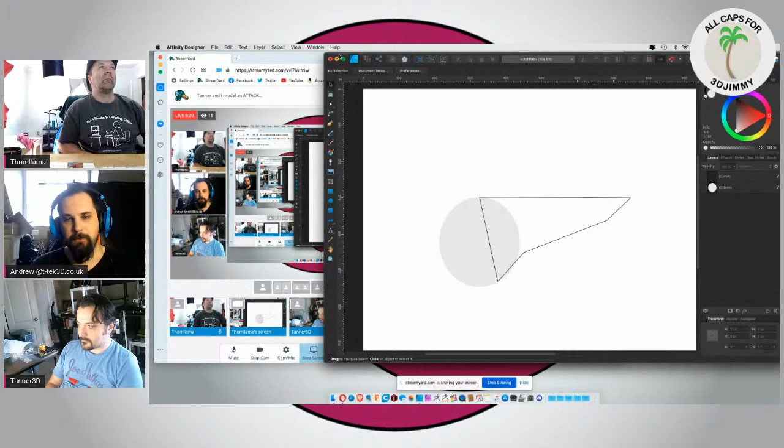What the hell did you do? It's all right, I just changed it to the 2. I was just trying to see if it would make it so that you could have yours next to you, so it'd be a bit easier. But it's just going to double up your screen, so if you minimize StreamYard then you should be fine. Anyway, so we got the bubble, we got the... do you want to do an upper or a lower tadpole?

Flip horizontally. I thought it might be interesting to just specify certain things of it, like as far as having the glass dome front.

Basically that's about our only option. Maybe have a wing on it. Obviously you got what I've got in mind, but the body shape I had in mind is a little different. That's fine, I still want to use the glass dome front. I'll use the glass dome front, but then have a wing thing here somewhere.

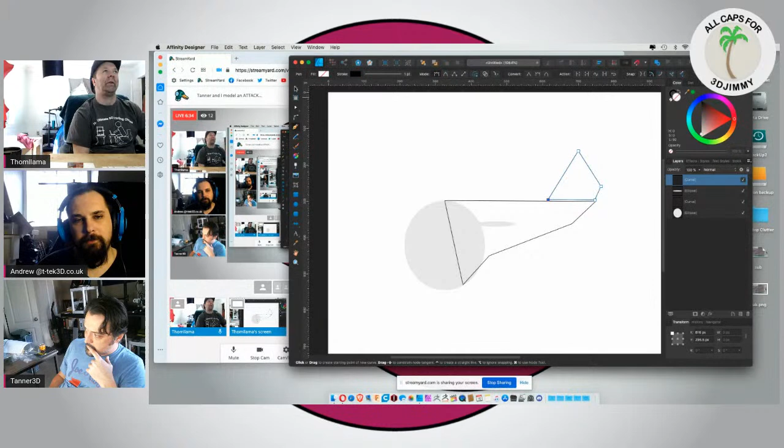I've got more of a bullet shape in mind. A bullet shape? Okay, this is basically what I've got in theory. Something along these lines, and these should all be doing a stroke so you can actually see it. Something along that line, you're going to do like a full-on bullet shape.

Oops, that's not what I wanted. I wanted that, come on, move that. Straighten out that. So you're doing more of an actual square bullet shape, right? Yeah, something more along those lines.

So the kind of idea I had was like a stingray style, with the bubble on the front, so it had the wings that come out at a slight curve. That would be cool too. And then the bubble on the front, and it just has—I've got some wing stuff I want to do too, but we've got to have some basics.

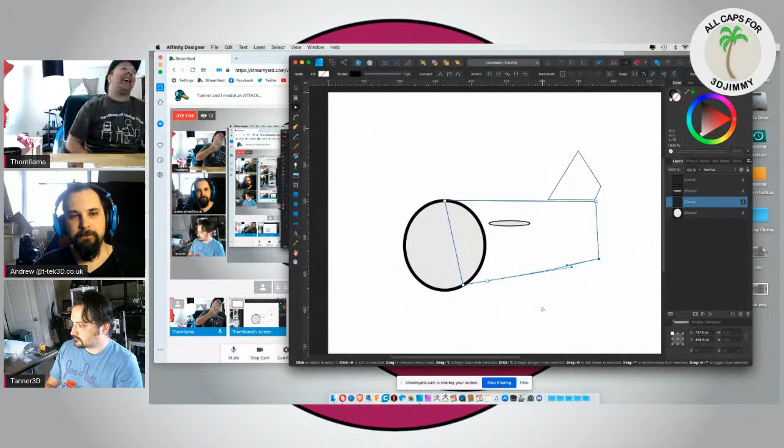For one, physically you need them, that's how you control yourself underwater or in space. But also you've got to have something to mount the guns to. We've got to have guns. But generally that's the idea, that's what we're going to go with. Correct? Yeah, all right, so let's just do it then.

And they're off. Firing it up. Torpedoes, yep, got to have some kind of torpedo or guns or lasers or water cannon or something.

So if more than one person shares screen at the same time, will it just ignore the other one and you switch back and forth? Is that how that works? So if I share mine, it'll just sit in the green room. Yep, until he clicks on it. Okay, yeah, ignore. That's very obnoxious, Mr. Apple.

What I think I'm going to do is actually change mine from sharing the screen to sharing the application window. So I'm actually going to kill this, right, that's what I'm doing right now. Screen, and then do an application window, which hasn't fired up yet. But now I just do Fusion. I now need 3 screens instead of 2, so I can look at my reference stuff. Yeah, I'm wondering, actually, think about that. I'm going to see if I can put this on YouTube right now before we even start and not have it feed back. I'm going to kill it.

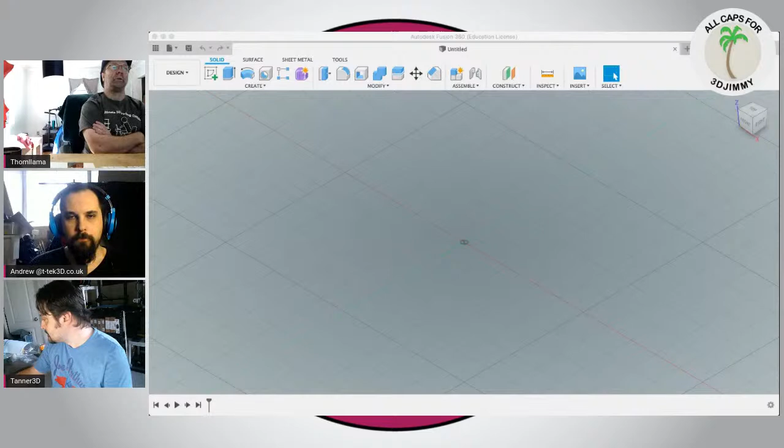Standing 4 straight inches up. 4 inches is 100 millimeters, a little more, a little less. And so, if I leave a gap for 100 to 120 millimeters, you could put your little figurine in it if it came down to it. So from the bottom of their butt to the top of their head is just over 50 millimeters.

And then the length of their leg to the tip of their foot—so back of the butt to the tip of the foot is just under 60 millimeters. So if you figure you give yourself enough room for a rise of 50 millimeters and a run of 60, yeah, so I leave an opening of 100 millimeters. I've got plenty of room to put like a chair and controls and any of that crap I'd ever want to put into it.

Which I don't know how we do, because if it's a glass bubble, how are you going to see through the glass bubble? Because we can't print glass. Right, well, that's where—we're not building these to actually submerge them, are we? No, but okay, because I plan on making cutouts so it looks like there's a framed bubble. Yeah, I was thinking the same thing. Put an actual structure on it, like wireframe, like I have now, but it would look like something, which that's way down the road.

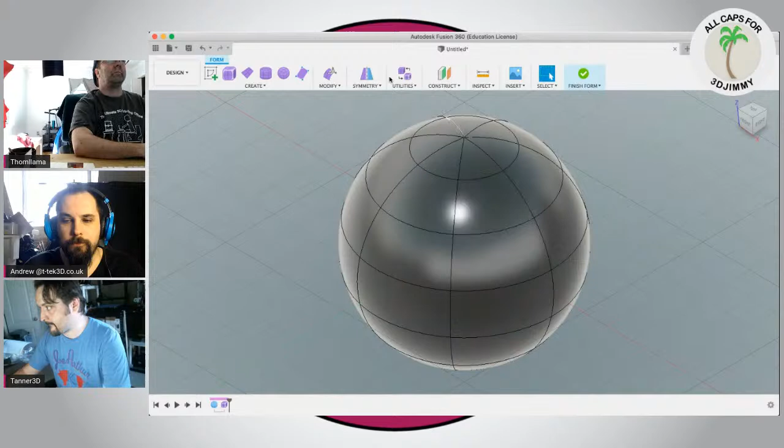Oh, come on, mirror. Okay, and then we'll just start modifying this thing for now.

All right. I wanted that. Actually, I like that better.

So anyway, this is my base shape. It's actually going to have more stuff back here. That's not what I want. I actually just want to grab this one line there and pull it back even more. Yeah, that'll work.

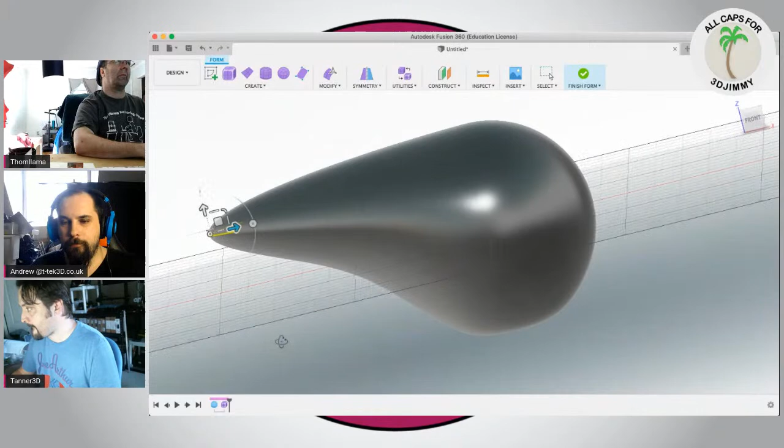And then now I can model off of it. Next thing I want to do is create on that one, that'll work, and make a squiggly line because everyone loves those squiggly lines.

How far up do I want that bubble going? Let's bring it up here. End it. And that works. Finish sketch.

I want to slice body, split body. That's the body, splitting tool. I want to be this here line. Okay.

And I should have 2 separate bodies now. How did I get 3 bodies? What did I do wrong? Was it the 2 halves? How did I get 2 bodies in there? Oh, when I converted it, that's why. All right.

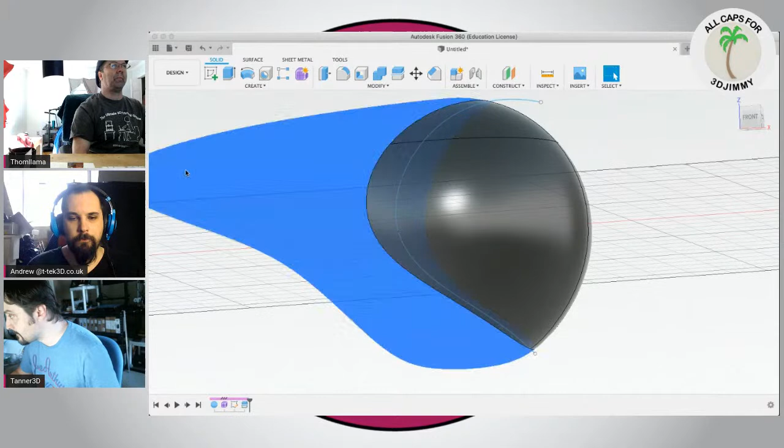Let me guess, the wrong body. No, I didn't. Okay. All right, as you're doing your bubble, has Tanner got his bubble done?

And then I select this face, and I'm going to shell it, going in both directions. I'm going to do... I'm going to do like 2 or 3 in, and then 2 or 3 out. And it's going to freak out, but that's all right, I don't want to go that much. Let's go 5, tab, 5, 5, and 5 are good.

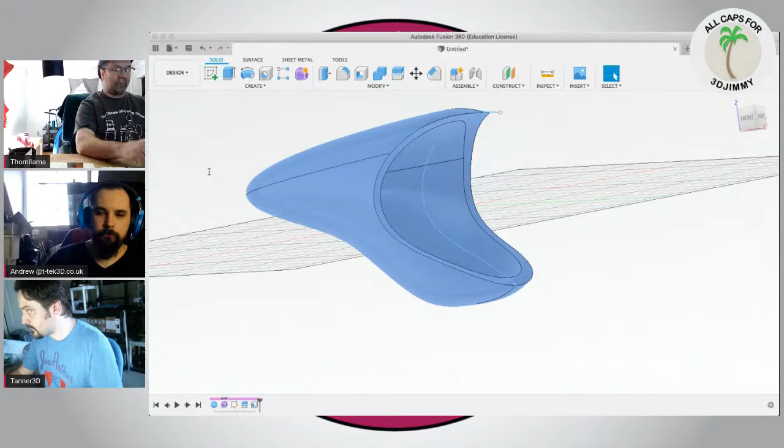And then I can bring back and name this body tail body, and make this the globe. Bring it back. And now I have a base submarine-y kind of tadpole-y looking thing already. Isn't that awesome? Looks like one of the eyes from War of the Worlds.

Now that you say that, it kind of does, doesn't it? And what else do I want to do with it? I want to jump onto Tanner's, see how he's getting on.

Hell? He's making a face. Oh, I see what you're talking about. So you're going to put like the propeller back there in that little area? Yeah.

That's a cool idea, that's a very cool idea. I was thinking more like jet propulsion-y, flowy. Oh, I was thinking of the 2 turbines with the rotational, like the Warthog, the A10. Okay, Warthog, like 2 of those turbines, but directional.

Right, so there's going to be out. Put the little trunk up, and you have the very first submarine ever made, in the Revolutionary War when the dude made it out of a crate basically, and pedal powered himself out there and then drilled a hole into the British boats. That's pretty much what it looks like, which is fine.

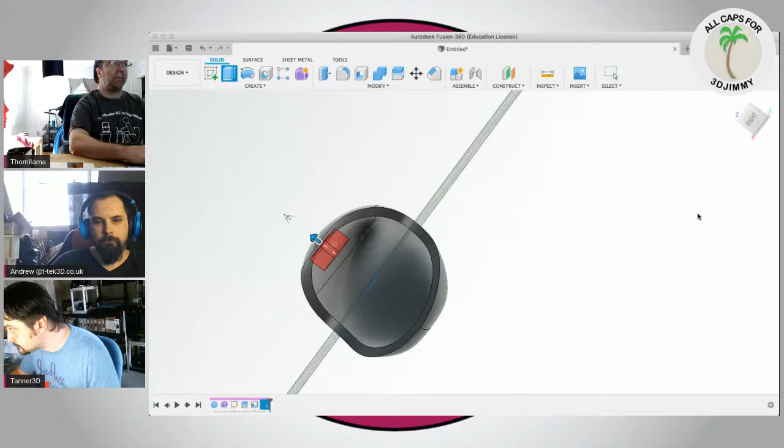Give it a gap. And that's not at all what I wanted. Join. Actually, I think I'm going to leave it as a new body for now. Does that look about right? I can go even more. Let's go to 70. Oh, crap.

I kind of like that, that looks all right. And now I can round this over. And that'll be all right. And then I should be able to, without it freaking out, round all of these over a little bit. I don't think I want to go that much.

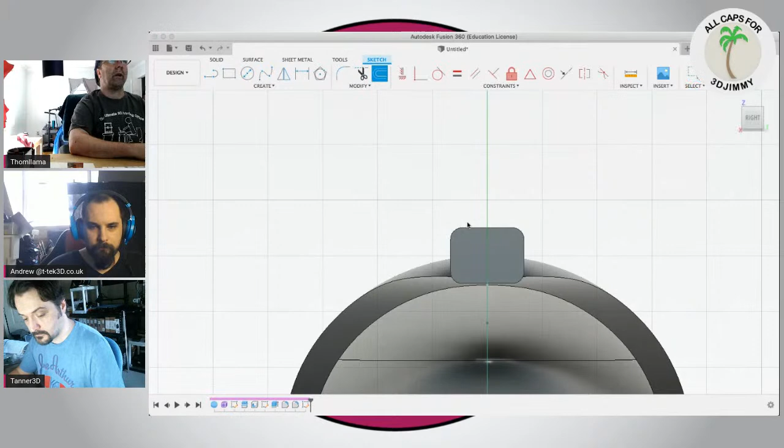That looks good. And I can take that and draw a sketch on it and offset that and go this way. Let's go -2.5. Enough? Sure it is.

And then do it again. And do -6, sounds good. And I'm gonna arc those some more right here.

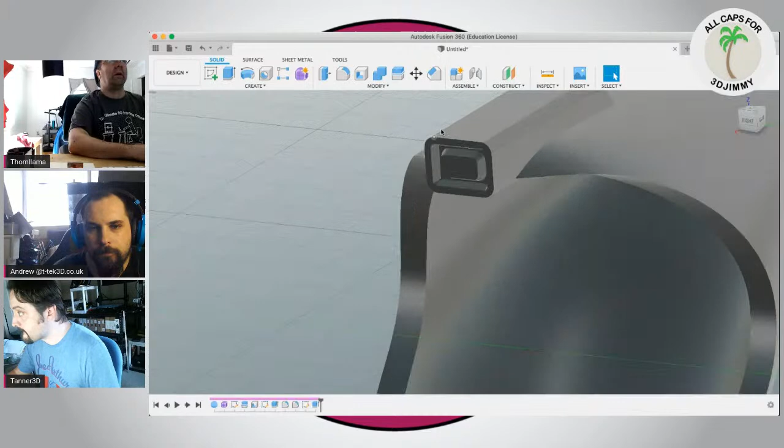And that looks good. And then take this, make it solid, pull it back just like 0.5 millimeter, and arc it there. Am I going the right way or the wrong way? Going the right way. I can give it a little pitcheroo. And then I round this over a little bit, I think, and it should kind of look like a headlight bulb. Right? Does that look like a bulb? Mm-hmm. Yeah. Like a headlight?

See if I can round this over without it freaking out. Just go like 2. Maybe I'll add this. Will it do it to both and still look decent?

Yeah, Seabreacher, I've seen that. What's that? It's the submersible vehicle that looks like a dolphin. And they've also got a shark, and they put it in the Red Bull races. If you've got enough money, you can buy one, a 1-seater or a 2-seater, and it's not meant to go full underwater. It can go underwater, but it's not a submarine as such. So they call it an aqua vehicle. Submersible as such, but not majorly underwater, basically.

There we go. I got a headlight and a little globy thing.

Wow, what does Tanner got? I didn't see what Tanner's doing. He's like going to town with wings. Getting the base structure. Yeah, pretty cool.

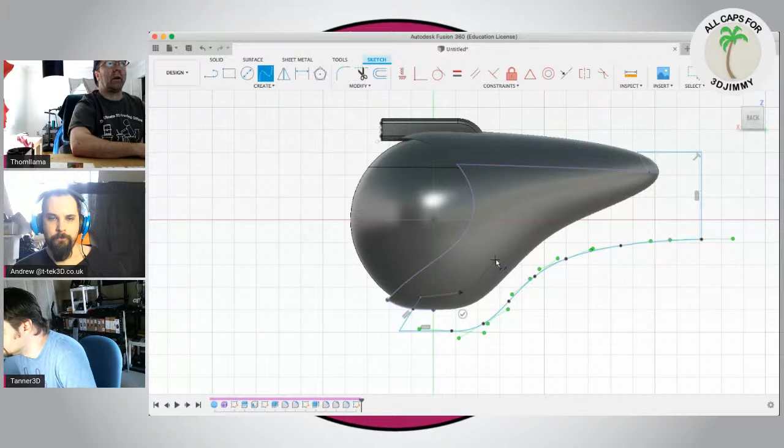And then bring this up. I think I'll go all the way up to here. And that should close me. And yet it didn't because of this escape. Yeah, because it's on a curved body. Yeah, but I'm gonna have to create a plane. Well, I actually wanted to go inside, so I need to do this. Join them, arc, so I got to bring it inside that base. Thing here, and again, following the idea of the shape. Close it, and now I've got a closed piece.

And what happened to my sketch? And I select that. And I expand it out in both directions symmetrically.

Let's do 25. And new body. Okay. I'm going to edit the crap out of it. And then take this. I probably should have done this in multiple segments. And go off of that. Well, do it that way. Yeah, why not? Fish of prey.

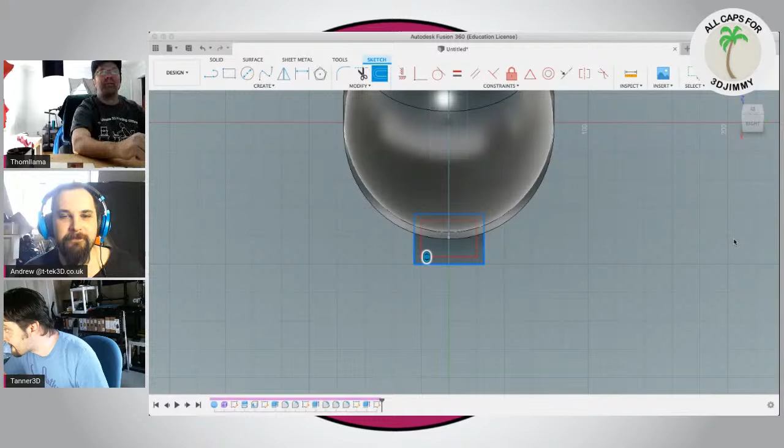We're just goofing off. So anyway, what's Tanner up to?

And actually, I wonder. Never even thought of that. I could do solid. I haven't used, not revolve, sweep. Let's see if I can sweep it. Select path. A path. Yeah, no, I didn't think so. Cancel. But I can create a new path right here to sweep it on.

Oh, I have to go to finish sketch. Yep. And then I need to make a new sketch here to make that sweeping path because I'm a dumbass. Now I can do that path. And that's all I really need because that's all you're going to see. Escape.

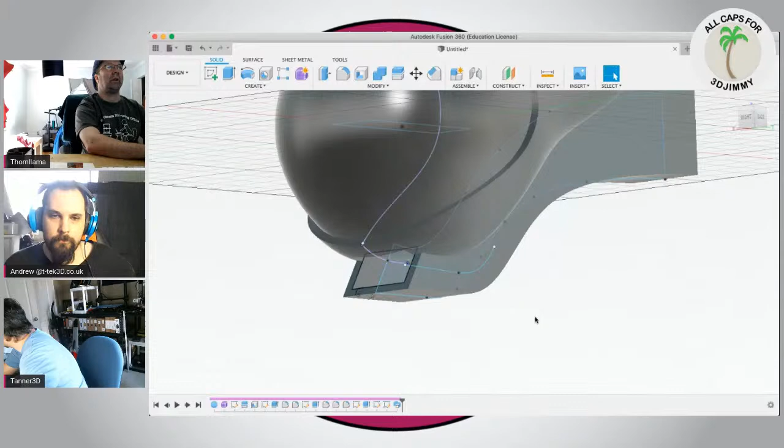And this one, this way a little bit. And this one can just go over here a little bit. Sleeping. Who's sleeping? Sketch. Or a doggo, I guess. And then I can take that and I can do my sweep. I never use sweep. I thought it'd be different. So path, sweep, and it cuts it out. Okay. That's my engine intake. Let's get rid of the sketches, see what it looks like.

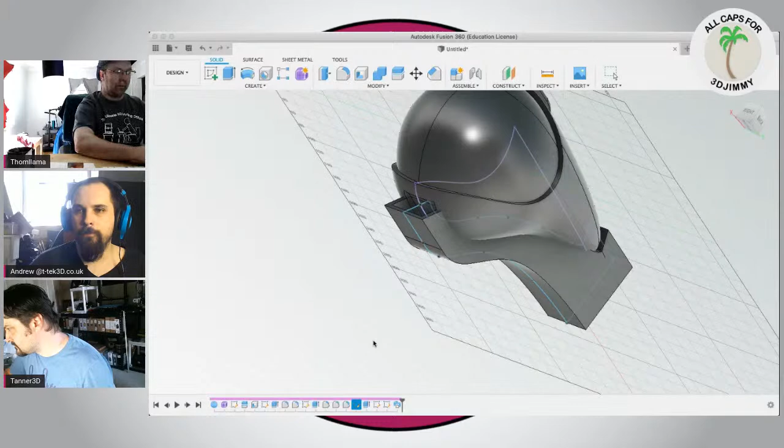Looks a little bizarre. I think I want to go back and change this. Edit, rename. That is engine intake. This is rename. Intake suite. Rename. Engine. Yeah, sure. Engine. Yes. So I know what the hell each one of these is.

Holy crap, dude. That doesn't look like a bullet. It looks like a freaking spaceship. It looks like a bullet from Mario. That's what it looks like. The grizzly teeth. Can't remember what it's called now.

Sketch. Delete the whole thing. Actually, I just want to bring this down a little. Actually, you know what? Let's do that. Finish sketch.

When I go to do the sweep, sweep. Where's my sketch? I want to get rid of that part. Okay. That worked. Did I do what I wanted to do? I believe it did. It certainly did. So now I can round this over. Didn't like that much, did it? Nope. And then, I don't know, I think I'll leave that actually.

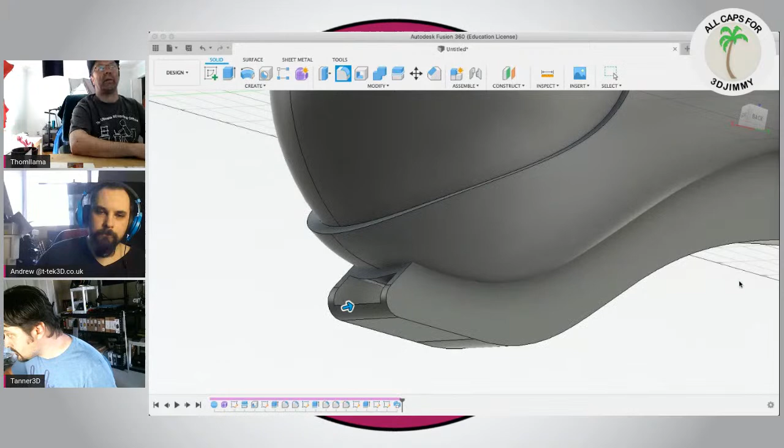I shouldn't have done this whole thing because I don't really like this area here. Draw a line on it and slice it. Yeah, but it's all tapered and rounded where I did this in the form function area. Otherwise, I would just click on it and do this, and I'd be okay with it.

I'm still not terrible with it. What looks wrong about it?

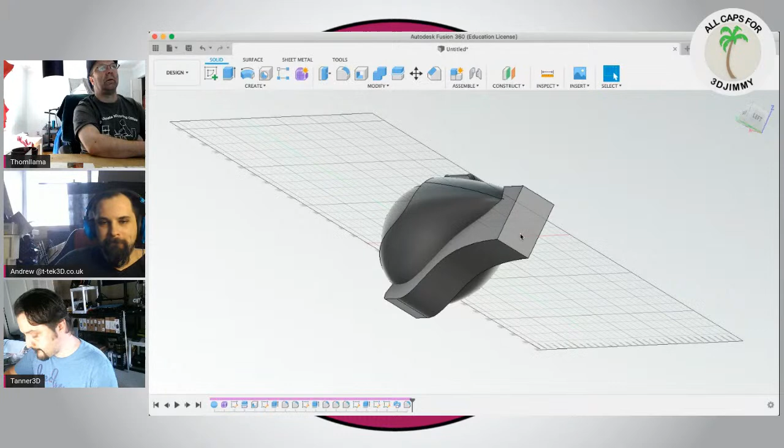I don't know. One of the fun things about modeling is I probably throw away 3 out of every 4 things I design, just never go any farther because you start messing with it, you hate it, and you just scrap it. Yep, start over. Been there, done that. It's like the model I was doing recently, just finished the final version, what is version 8. It took me 3 days to detail it all.

Let's design something on here. Let's take this and go right about. Go up above it, down below it.

Here you go, Tanner. Because you're using Blender, how do you keep everything scaled and sized? Because that's one thing I found with Blender is trying to do anything with measurements is really bad for it. You can go that route. For the most part, I just eyeball everything. Because that's basically what I just started doing after all, is just eyeball it.

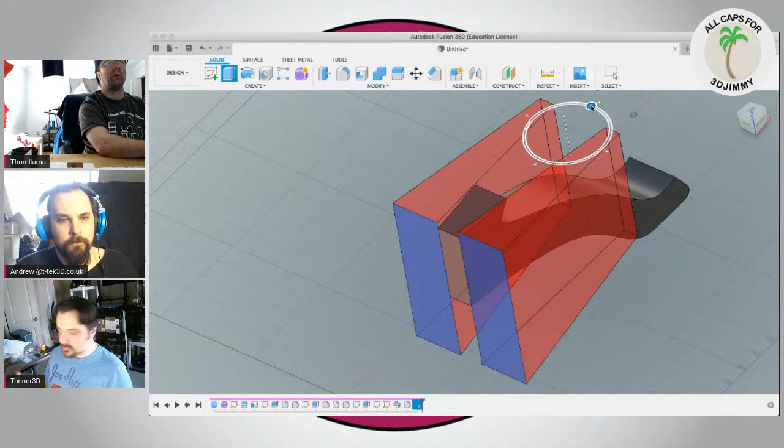Like you get a good feel for when you're putting a wheel on an axle, you get a good feel after designing a few how much clearance it needs - it'll snap on and not come off. You would break it before you pulled it off, but once it's on there, it spins freely and with little effort and for a long time. So that rolls really well. And that's just eyeballing it. I'm sure there are exact tolerances I could get into that would achieve that goal, but then there's more typing in numbers and less just grab it, size it, look at it, and go, that looks good, move on.

It's always the thing that I've kind of looked at is like when I was using Blender, it was really difficult to get anything to size. And it was always where I separated the front part of the bubble and the back part of the bubble. Yeah, you see this space here in between these two lines, this line and this line - that's just eyeballing a gap for when they're printed as two separate pieces. They should, because of the nature of the material, meet together flush and nice when you're holding the real world object in your hand. But when you're looking at it on the screen, it looks like there's a big gap there. Yeah, and you just kind of get a feel for it over time.

Yeah, I much prefer the ability to say, yeah, this is what I want exactly. But see, the thing is, I don't know what I want. It'd be hard to say this is what I want exactly when I have no idea what I want. Yeah, that's the thing. Each designer will always change his kind of preview on what he's doing constantly because he doesn't like this piece or that piece. It's the difference that I found with Blender is that if I did a measurement on one model and I wanted to transfer it onto a different model, I couldn't. I had to start from scratch.

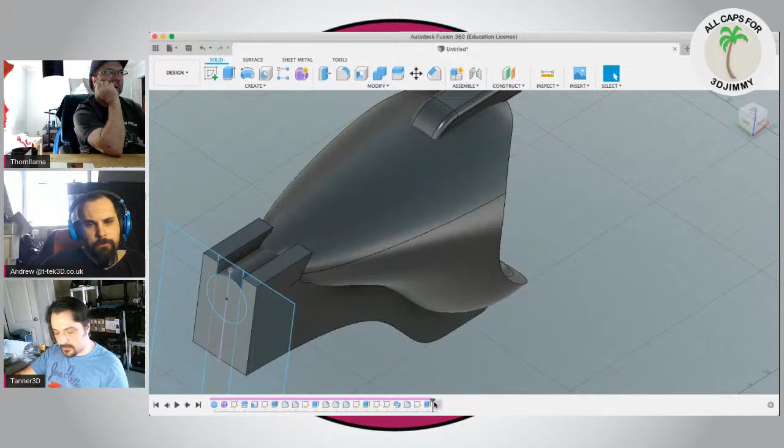One of the things I don't like about Fusion is the way it automatically just shoots off the view wherever you don't want it.

Let's see, I'm in this here. Edit sketch. And I want to come off of. Can I project that in there? Yes, I can, that'll work. I want this. That's what I want, okay.

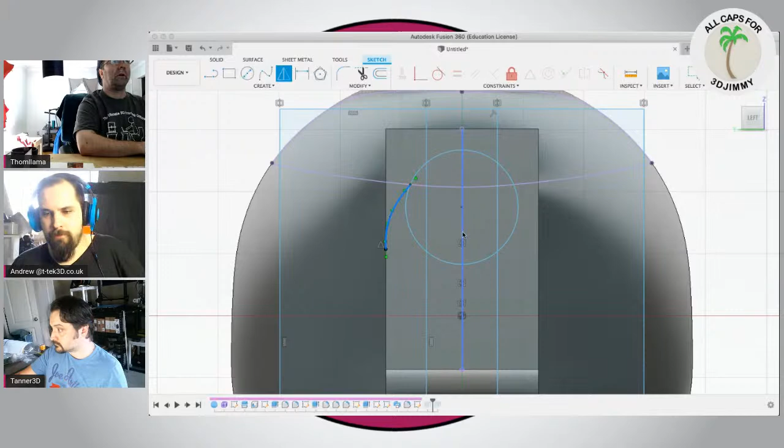Reference image. So from that, I can take this and kind of do this. Be done with that, and then create mirror and select that. And mirror this line, and go to there, and finish my sketch and edit this so it includes that and that and that and that.

And I should get a nice little thing here with a little bit of a rib in it. And then when I go to here, it should knock most of that right out. Yep, sure did. Now it's got like a weird tapery thing going on.

See, I like how different both of your designs are. That's the best thing about seeing this, when you see two different designs come together. And like we were saying, it's also the two totally different modeling softwares, two different workflows.

Dude, that thing looks bizarre, man. You like those swept forward like wings, huh? I know what it looks like. They look like those manta ray things. What do you call them? The little, you know how mantas have the two pieces of skin or whatever in their mouth that stick forward. Yeah, it looks cool. I like that, Tanner. I like it a lot, actually.

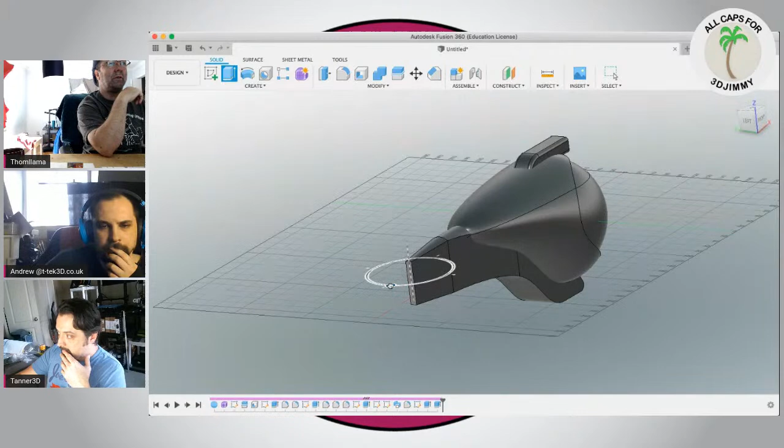Now, the one thing I wish I could do here that Fusion doesn't do, and I think there is a way, is like if I pull this out and taper it, I wish it would let me taper just the two sides and not the top and bottom, or just the top and bottom and not the two sides, you know what I mean? I mean, it's all right here, I'm okay with it, but I wish it would let me at times just do one or the other.

And I have absolutely no clue what I'm doing at this point now. I'm just kind of guessing at what I wanted to do at this point. I had it up to here in my head.

Well, I'm just thinking, see how you've got that curve that goes under? Yes, up here, there, right there. See that curve? That could be where your winglets go. And you can also have your engines on the sides of them, so they're standoff on the wings. Well, this is going to be more like a jet ski kind of engine. This is your intake here. So it's actually going to flare out right here with the two engines right here.

See, so you do the vents so on. This is your intake and that's your output. And it's, you don't even see anything because it's like a jet ski, it's all internal. See, I like that, I like that. It's a sleek design.

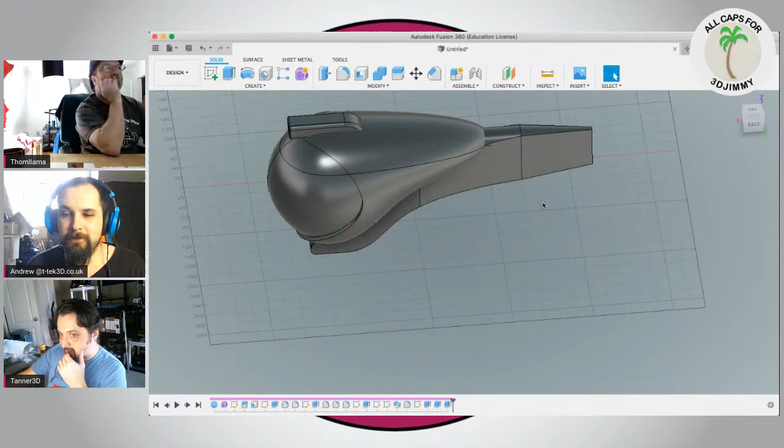No propellers then, I don't want to model propellers. I mean, I can, you could probably still see them in the backside, but. Well, I've got the wings going to put right here. Matter of fact, why don't I just do that?

Going to Fusion, here, and I can just do a slot. What's it called again? Like right around here. Oh, that's two-dimensional, isn't it? Nope, that's single. Oh cool, now. Might be in my search bar, actually.

And then escape, let's pull this way back. And then let's get rid of all the bodies, because then it'll try and select them. And let's get that. Whoops. Helix generator, do that. Bring the bodies back.

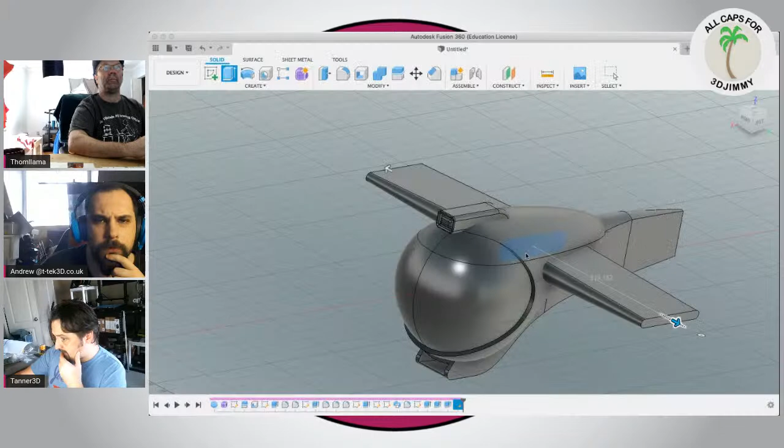And then extrude this out. I don't want to cut, I want a new body. And I want to go both directions typically, and I want it to taper down. How much is that? Let's go with 2%. Yeah, I like that, I can make it a little longer. Not too long. Yeah, I think that's too long.

I'm realizing now that I should have done something a little different. Hide that, and then catch later, Thomas. Is that here? How many people are in here? 10 people, that's it? I applied a solidify modifier to it before I should have. So go back and take it out. Well, but I applied the modifier, so at that point it became destructive.

So now I gotta, that's what I like about Fusion, is I have this timeline on the bottom where I can go back and delete the faces, scroll through it, and do whatever I want. Well, I just had to go back and delete the faces, it just took a minute because.

And then, I actually don't even think I want to modify those winglets. I kind of like them just square and straight and simple. Okay, let's ring cut that.

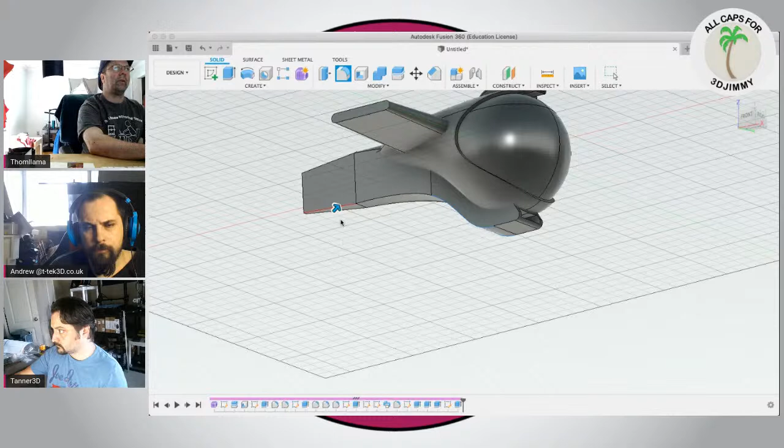I'm not hating that. How much more can I do it? What do I got on there? Well, let me go to like 15. Well, but I can see the cutout. Oh, even smaller, actually. Okay. I kind of like that. I think I'm going to leave it.

What the hell am I hearing? There's a cat meowing? Yeah, my cat's in heat. Oh well, my kitten—kitty, go get laid, kitty. She's outside the door, the door is closed as well. It shows how loud she is.

Here and bring it up here, so I can now combine these two. Okay, now they are one. And I believe I can smooth this out now.

It looks like the front of a B-52. Not B-52, is it B-52? Memphis Belle was a B-17 Flying Fortress. Yeah. Freak out if I had that—no, it's not. Let's go with 10.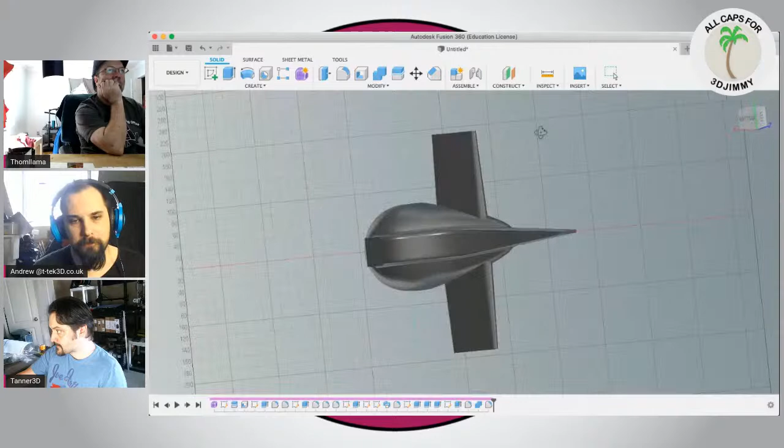Okay, I gotta make some kind of engine-y thing. Now, a propulsion exhaust, I'm guessing. Yep, there you go—propulsion exhaust. That's the perfect way of putting it.

You know what else I want to do, though? I want to smooth this out first. Oh, so well, let me—how about 20? See, you could do something very easy there. See, right at the back, if you round that—well, before you round it over, draw some lines in it like a grill, and then round it over with the lines and extrude it into it, so it looks like it's got the propulsion right at the back. Oh, I'm gonna have like a big massive freaking exhaust thing.

You're saying like right out here? Yeah, right out the back, and just round it. What you do is just draw the lines on it, then push it in slightly, and then round it over. Yeah, so it looks like a vent at the back.

What the hell? Cancel. All I want to do is round over that—smooth it out. Like so. And I'm okay with that. And I'm actually liking it so far. The only thing I don't really like is right there.

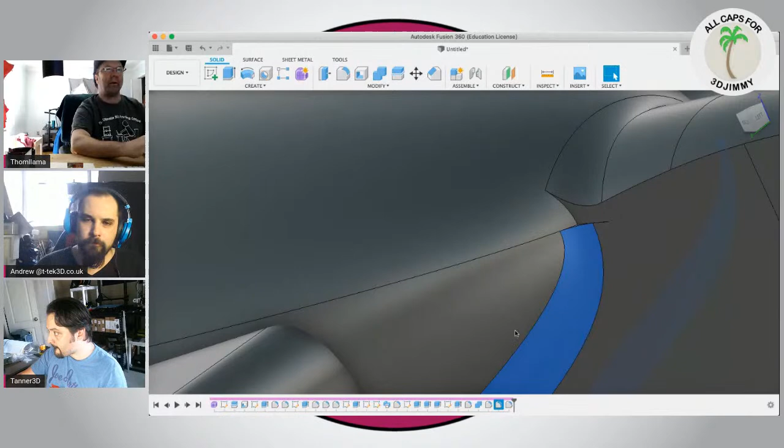That's kind of odd. Which round over is this? That's this one, and that's that one. Let's see if I switch their positions. I didn't do anything. Edit feature. Let's see if I can just add that. Come on, baby, work. Yes, that's exactly what I wanted.

That is the one thing about Fusion—sometimes it's like, will it do it? Yeah, I get that way too much. You're like, oh, is this going to give me a red line? That means that I can't move it and I can't do this. Or you move something and it moves the entire model, and you're like, yeah, what?

Now why did it do it on the other? That's what pissed me off. It did it fine on the other side, but this side it won't do it. And they're exactly the same. So why didn't it do it? See, it works on this side. Why doesn't it work on this side?

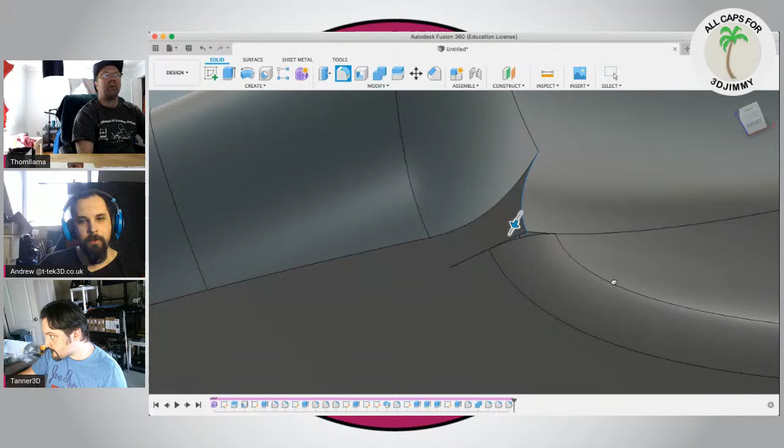I cheat because I create a half plane, design it all on one side, and then just mirror it together. My problem is I can't visualize stuff that way a lot of times, I just don't see it. I generate images in my head and design everything as I go along, so I can see it the way I want it to be. I can draw a box and turn it into a really nice shell, but it always starts off with a box, half a box, then I do whatever I want to it to generate what's in my head.

What can be a problem is that generally with the workflow pattern in Fusion, it can be very picky. It's saying that's not attached because it's going the wrong direction. Honestly, I'm not hating that joint - I don't really like it, but I'm not hating it either.

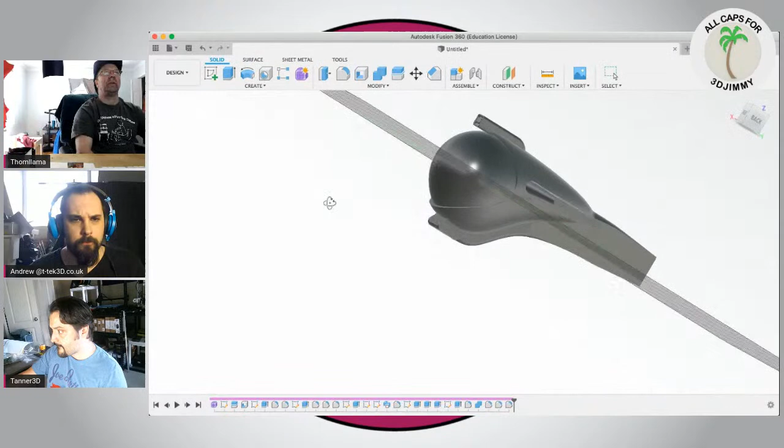Let's see if I can edit it. Nope. You go away, and you go away, and you go away. All I want is you.

If I go into here now, I can use the utility and convert. I want to go the other way - I want to go from B-rep to T-spline, right? Yep.

Wow, it's making a whole lot of stuff. Oops. Okay, why don't I make that piece?

I think it's just being picky. And here's the problem where my computer starts lagging.

Yeah, it does that a lot on mine too. Mine's a custom built PC - once you start getting into meshes, lots of lines, lots of drawings, it just really doesn't like it.

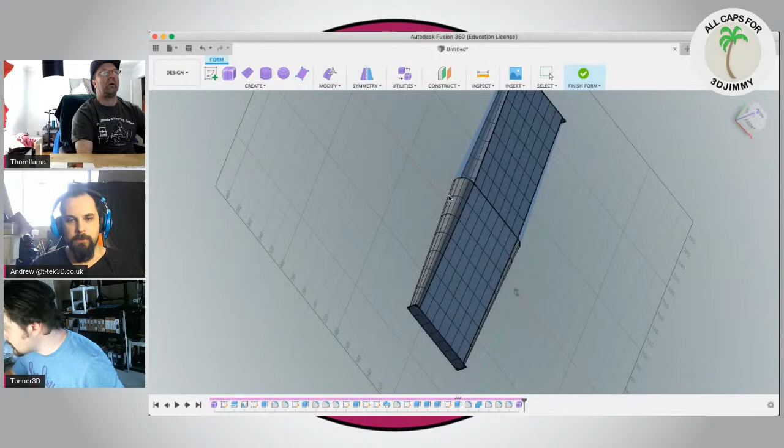Why isn't that converting? It's like converting inside instead of outside. Check that out. You can then just invert it - if you highlight it, you can invert it.

But it's only doing like partials of it. That's weird, it means it's not seeing a complete mesh body then. But why not? It's exactly the same on both sides. Because it's Fusion, don't ask me why - Fusion does this with me all the time. This is why every single question I had was always about things like this, it just randomly would not do it on the opposite side.

Let's get rid of that. If it comes down to it, I'll edit it later. I'm not too sure I want to anyway - I kind of like the wing being all squarey and kind of centered.

I was thinking I could distort it and sweep it back or sweep it forward, but I'm not even that worried about it. Just remember, you got to print them.

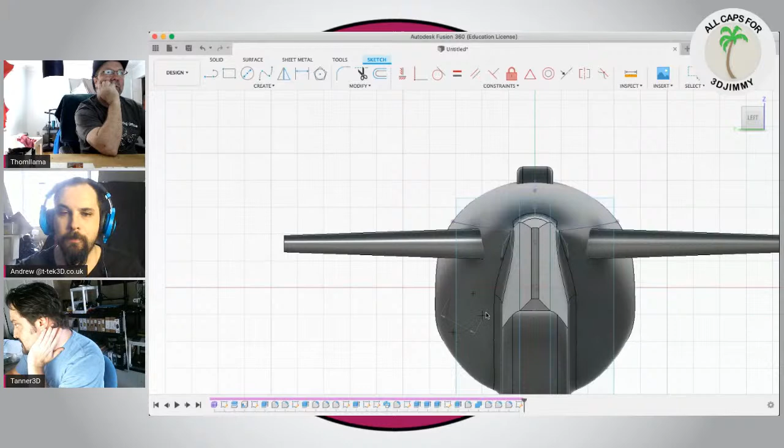That's not what I wanted. Will this do what I want it to do? Sort of.

Trying to use stuff I don't normally use too. I always tinker with tools I don't understand in Fusion and just play with them - easiest way to learn.

Why am I getting an error? Off, off, off. Troubleshooting, experiencing graphic issues - uh-oh, my video card is not good enough. All right, I'm okay with that.

Hey, Minute Winks. You didn't miss too much, apart from most of the build. You didn't miss much, but, you know, everything. I didn't want to say that - make him feel bad for walking the dog.

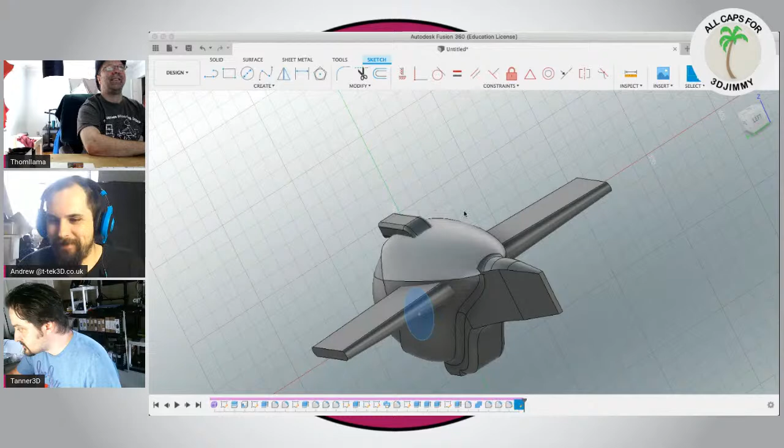And then I want to go solid and pull it this way - wrong way, buddy. This way, probably not that much. And then do it offset by, I don't know, 100.

Offset 100. Negative 100. And not quite that much. Let's do it negative 80. And I think that's okay.

Scale, shift Y, do this about 100. Negative 100. And then just for giggles.

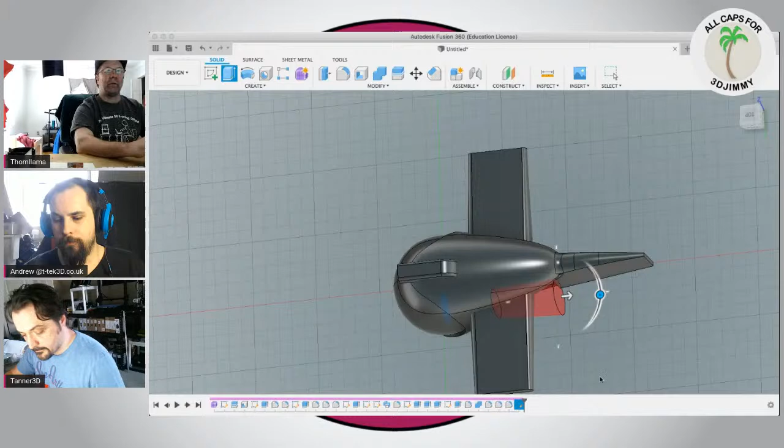Joey, let's do it by like 3. Nice even 3, how does that look? Whoa.

I don't know, 4 degrees. I'm not liking what I got going so far, so you're not missing anything. I'm okay with that.

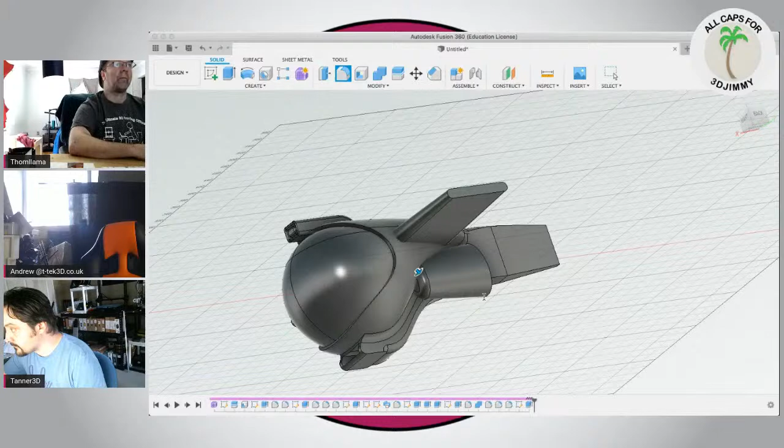And then I will just mirror this. Actually, you know what, I'm going to do more work on it first because I'm going to round this over while it's a separate body. Oops, too much. Let's go with 10, that looks good. Okay, and then I believe I can just show this on the inside only and make it about 6 or 5, and that'll do that.

Do I really want to show it though? I'm going to knock all this crap out. I'll figure that out. Create mirror. A body, this body, select mirror plane, I want that plane, and hit OK.

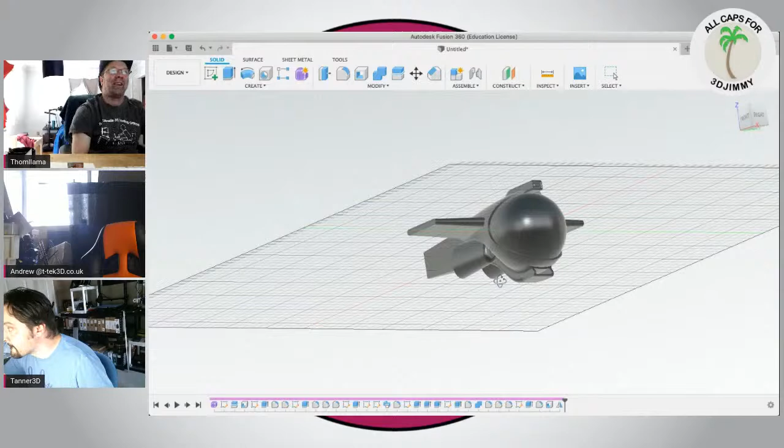Now I have my 2 engine pods. And now I'm done. No, I kind of am, I mean very basic shape. I kind of got my basic shape I wanted. I think I need some kind of a ruddery thing coming up here, but I don't even know if I do. This could actually be the rudder.

Got to clean up in here. So let's select this and do a sketch on that, and that, and solid, and get rid of all the bodies.

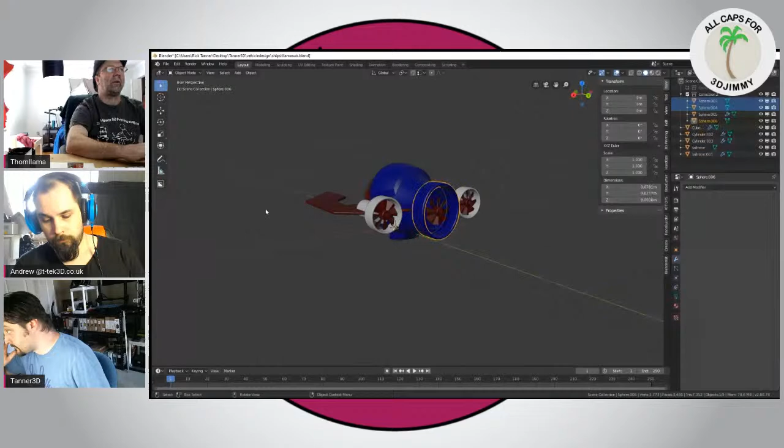What I want to do is select, I want to let me select that. I want to select that hollow. Why can't I select that? Oh, because I haven't done projecting. Dude, I want to select that, do that, and then bring the bodies back. And I want to straighten this away.

Straight out. Okay. And then I want to take this. And somehow or another, I'm going to have to do a section analysis. Where can I do a section analysis from? Right here.

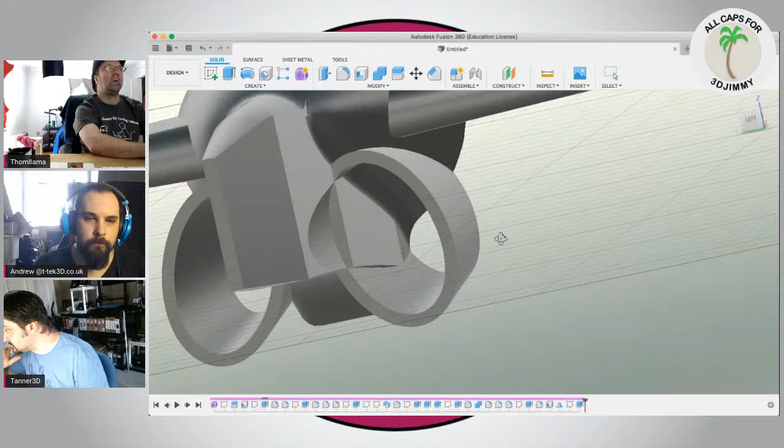Section analysis, I want to go this way. I'm inside those engine pods right around. Where do I want to do it from? Let me think now. I want to do it right to there.

A lot of commotion going up and down my driveway. What the hell's going on? Somebody here? Oh, I know why they're having their little funeral-y thing today.

Oh, I forgot about that. That didn't do what it was supposed to at all. Not at all? No. Maybe it's because I didn't have the transforms up. I wonder, I've never tried this. No, can I still put a sketch right here? All right, it won't let me do it all at once. What is it? So it's a, we'll just sketch, do one.

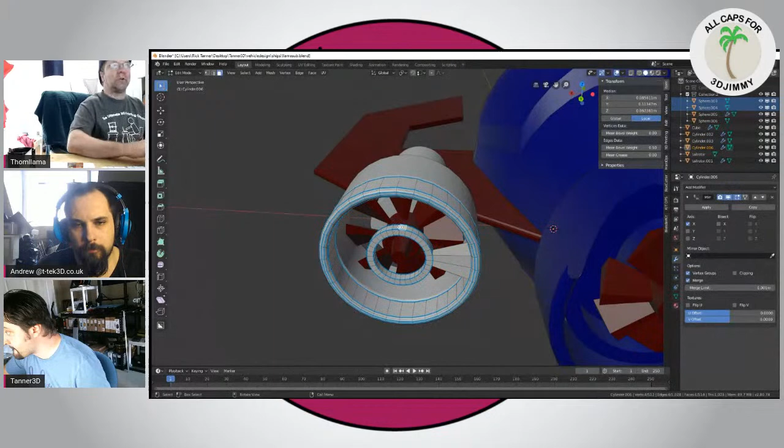Project. Yeah, it didn't do what I wanted. Cancel, Command Z. But what I can do is put a plane right there. Construction plane, bring it out here. Whoops, come on, come on baby. I know you can do it, you've done it before, you can do it again.

Right around there. Okay. And then, actually, project. Well, won't let me project. Oh, because I don't have a... I need to put a sketch there. Then I can project.

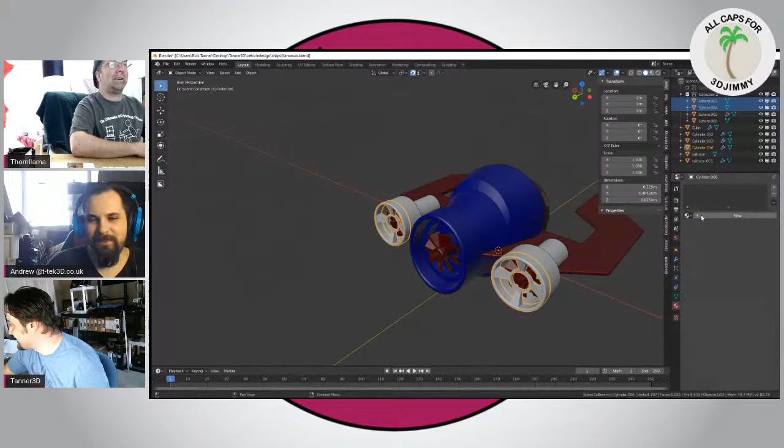See, we'll have to give them like Action Man names, like the Tanner Turbulent Turbine Machine. Crap, that's funny. And the Llamersible. Immersible, I like that, I like that too actually. A little immersible, I was just going to call it the Llama Attack Sub. The immersible, I like it. I do too, I do like that. That's hilarious, a little immersible.

Finish sketch. I'm not sure how I want to pull that part off. I still need to add a vertical stabilizer to it.

I wonder if I can just push that back, what it would look like. Let's find out, only one way to find out, right? Just push it back. Yeah, I don't think I'm going to like it. Although it's not terrible.

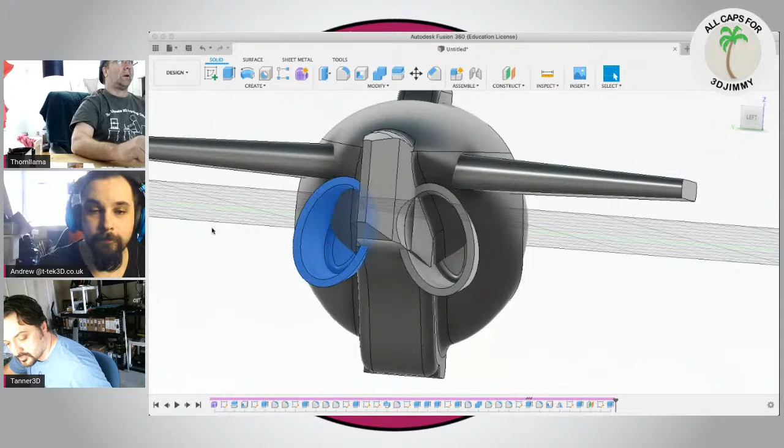There's a way to do what I want to do, and it's stupidly easy, and I just can't think of what it is. Oh, I know, duh! Command Z, what have I done? If I put a line here, and I take this, I take that, and I just go solid, and I go this way. I think that's where I messed it up. Okay, I think I can do the cut.

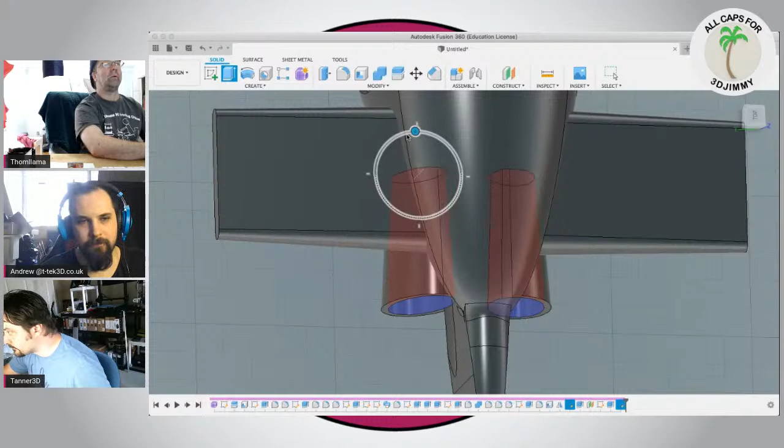Okay, stop, stop I said. Fusion's slowing down on me. Come on. Yeah. Come on, stop freaking out. I hate when it thinks, I wish it would stop thinking until I've entered an actual number, you know what I mean? At least that hasn't gone just white, where everything just blots out and it goes like this clear kind of color, and then you just can't touch it until it figures itself out.

It sort of did what I wanted to do. Not perfectly. Let's go with -4. See if it cleans it up. Makes it worse. -3.

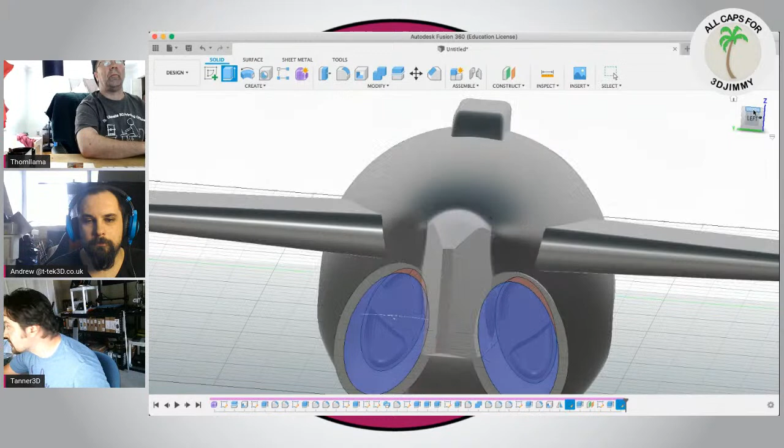Let's just bring this to -90. Come on, stop thinking. Stop doing stuff until I actually give you something to think about. I'll give you something to think about.

The only thing I dislike about Fusion is it's always trying to do it immediately. I really wish it wouldn't until I hit something. I'm okay with that, it made the inside of them engines all nice. Although it's hollow right here.

Because I shelled that. And that's an easy fix, I just don't go back as far. Or I taper it more.

Negative 85. And make this negative 4. I still got a hollow there, don't I? Yep. You should just be able to click on it and delete the faces that you don't want, and it should seal it.

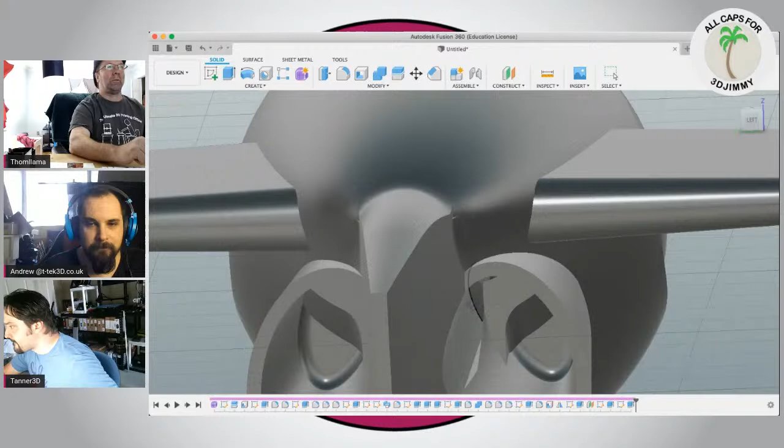What the hell is this? Actually, it looks pretty cool. It does look cool, but I'm wondering what the hell it is. Oh, it's the leftover from this body when I back cut. Oh I see, because I didn't back cut this cut here far enough.

Is this the one? I don't know. Press pull those edges and just make it a little bit thinner, and it'll look like you've got directional vent thrusters, they're really cool. Too tapered though, if I just press pull them they'll just do weird shit. There's too many oddball angles and crap.

That's not terrible.

Okay, what are you thinking about? Thank you.

Plus, streaming is making my computer completely dog out. Yeah, see how it made weird edges and stuff here? Real thin stuff because everything's tapered.

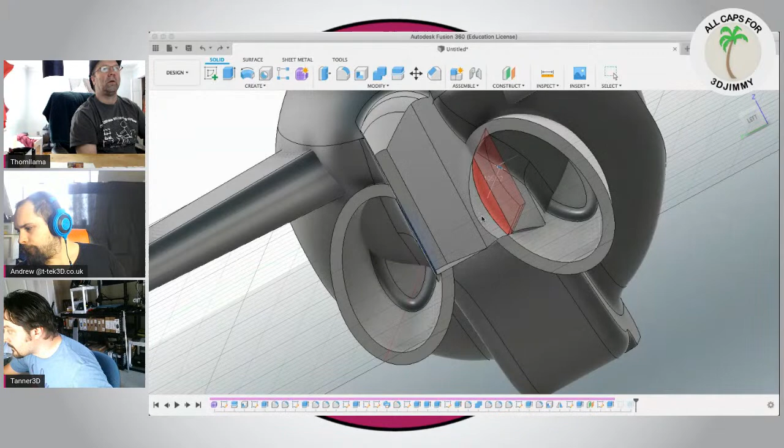I don't know, I think I'll leave it for now. I can clean that up later. I just want to copy and shrink. Container.

I'm going to have to quit in about 5 minutes anyways.

But I'm kind of liking my base idea shape already. I'm happy with that. Holy crap, look at Tanner go. He's got like props and propellers, it's pretty freaking snazzy.

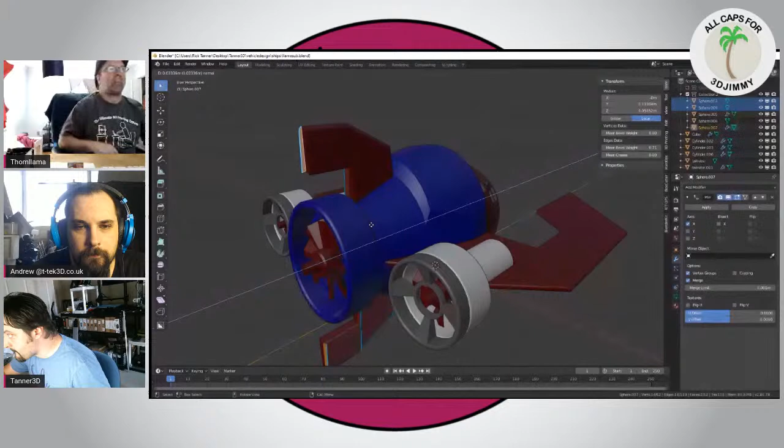Let's see. 25 it is.

Body. Oh, can't name it until I actually do something with it, huh?

Let's do 165. Negative. Negative.

Round this over some. Actually, you know what, I'll round this one over some. Oops, wrong key. That's a little too much, let's do it like 10. That'll leave me a tip here.

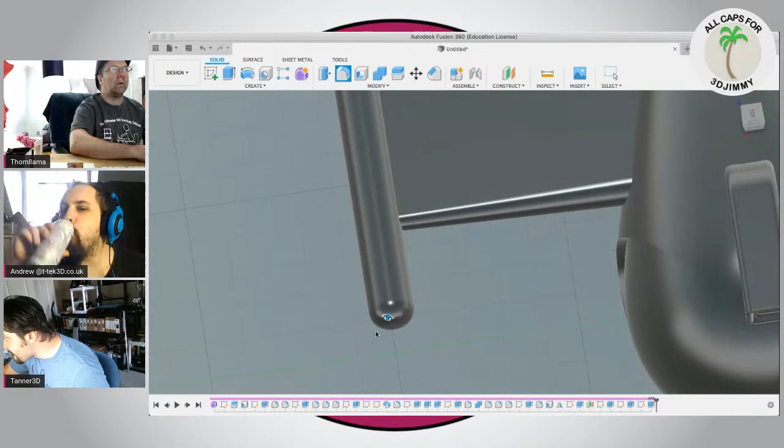Yeah, sort of. Okay. This, I want to just pull this way.

Let's do it, I don't know. 95 sounds good.

Okay. Never titled that. Right, I did do that.

I don't know what it is, a gun. Sure, we'll just call it a gun for now.

I think it's time to save. You guys got some freaking doorbell going off or something? I was going to say, whose doorbell is that? Yeah, it's mine, the neighbour's cat keeps walking in front of it. Oh.

Save. Sub. Just mute it.

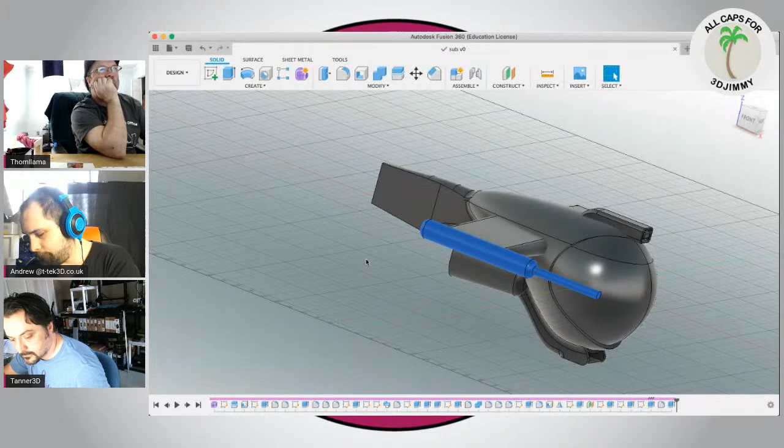And then we mirror the body, so I have one on the other side. Mirror, body, this body, select mirror plane. This one. And poof, now I have a second gun.

And then I think I gotta put a rudder on it.

Llama, Tanner's got more missiles than yours. Yeah, Tanner's just pasting and copying. He's got missiles already pre-built. No, not these, these were from scratch. Yeah sure, I don't believe a word of it.

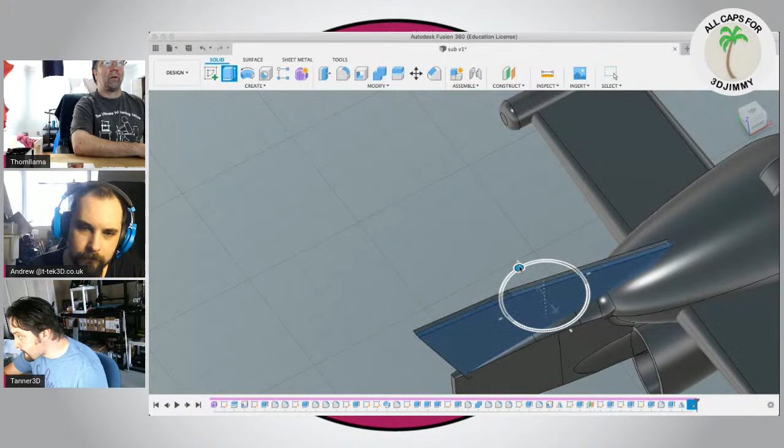And what's going to happen if I taper this a little? It's going to give me the thought process I thought it was going to do. Surely is. -30 sounds good. And poof, I have a rudder.

And I got to quit, guys, it's freaking 11 o'clock, I got crap to do. Save. So tomorrow on Tanner's channel,

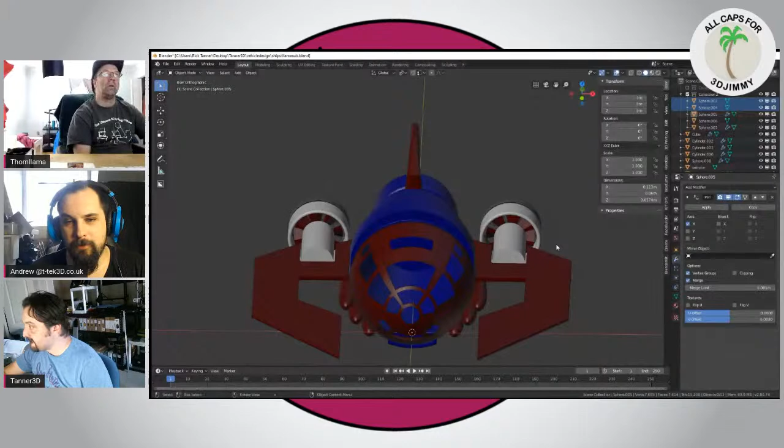we will do more of this. Right, so we do a spin around preview of each of your work. So Llama's spinning his, Tanner we'll go to yours, and you can spin yours around. And now Tanner's like all into modeling now.

He don't want to leave. I got to get some crap done. It takes me a while to get in the zone, once I'm there, that's when the magic happens. I kind of was, and now I'm out of it because I know I got crap to do.

Kind of like that, so you can see the wings inside there. Those are pretty cool.

Let's see, let's just home it so it looks all nice. So yeah, there it is. Progress so far, anyway.

Oh Robbie Mac, that one was a pun worthy of Bryan Vines. What? I haven't even been watching chat at all today. He said he really likes the submissions so far. Well, that's funny, sort of. Not.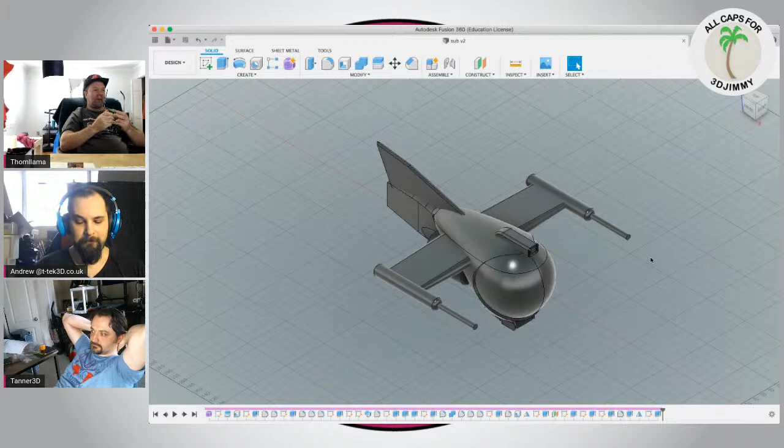It's really interesting watching, seeing two different programs, two different workflows, and just two different creative processes. Yeah, well that was kind of the point. That was my thought behind this, is not really to be a competition, just comparing.

Right, because we started with the same end goal in mind. Yeah. Well, but we had different ways of getting there and different ideas of what that end goal should look like.

It's almost like the government going, okay, we need an attack sub. Hey Sikorsky, you start building one. And hey, whoever, you start building one. Right, well I better save, I haven't saved in a while. Some other military freaking company say, hey, we want to build a sub. You guys design them, and then we have a competition on whose sub actually works.

See, I would say Llama's is Action Man style toys, and Tanner's is Tinker Toys kind of style. Tinker Toys? You know what I mean? The two very different variations. Like, one kind of looks modern and in your face and garish, and the other one's like, kind of sharp lines, everything kind of comes together.

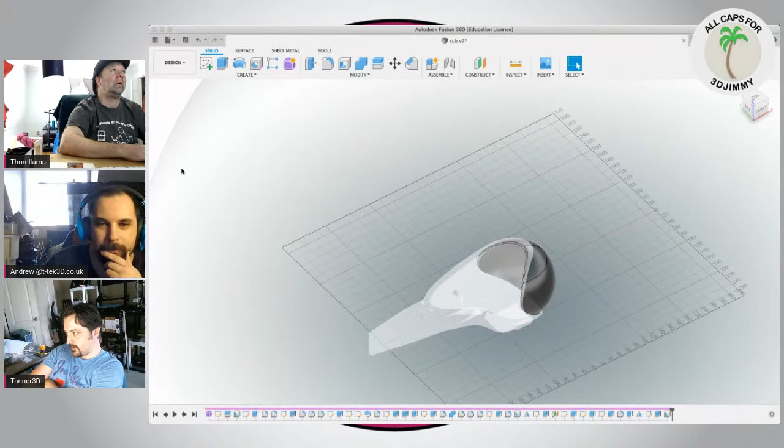Yeah, see, I could do that with a solidify modifier until I cut the holes out. But I wasn't going to cut the holes out. See, you actually cut holes. I wasn't actually going to cut holes out. I was going to leave that there, copy it, and then swell out or cut where I want the frame structure, like you have. Well dude, that looks like, now that I'm looking at that, that looks like a B-52 airplane.

Yeah, that's what I said earlier. Memphis Belle B-52 cockpit. Yeah, it looks like an old World War One or World War Two airplane cockpit. Which I like, I think it's freaking cool. I was just gonna do like glass pipe structures, if that makes sense.

Yeah, but like the solidify modifier, now that I've cut all those holes in it, will go all wonky. See how the solidify modifier tore that all up at the front? Yeah, because it's too small or something. Actually, well yeah, it did kind of screw it up there. Yeah, isn't it because it tries to merge all the faces at once and add thickness at the same time.

Yep, right, you almost need to do that before you cut the holes out. Well, but you can't do that either, because that's the way I had it at first. But then the problem there is the way the solidify modifier works, the holes on the inside won't always line up with the holes on the outside. Yeah, but that makes any sense.

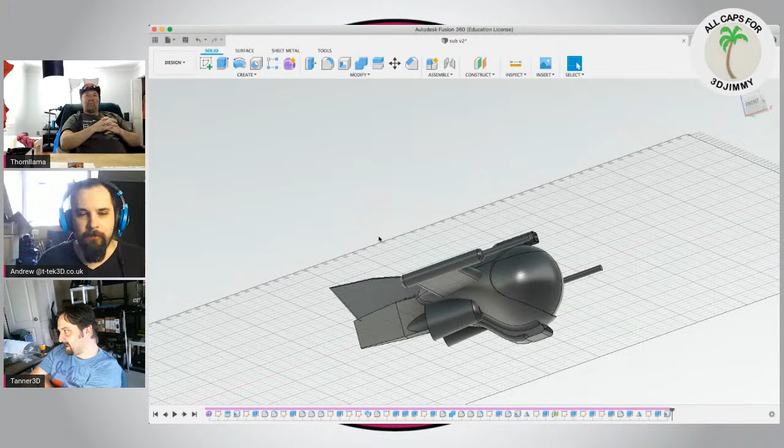Only if it was going to be a spaceship, I'd have to get rid of the props and replace it with jets. Yeah, that's why I kind of went with the whole jet ski kind of, whatever you call that, propulsion. What the hell do they call that? Impeller, is that what it is? It's actually something else they call it. Technically, it's a force induction motor. Yeah, there you go, induction.

Because they do it with airplanes now too, like RC airplanes that look like jets - EDF. It's got the air duct inside of it, force duct or whatever they call it. Electric ducted fan, ducted fan - there you go, that's the exact word I was looking for. Fan duct. Which is basically what this is, the fan duct.

So Tanner, have you named your sub yet? Not yet, but as the design was coming together, the reason I gave it the color scheme I did is it's looking like a Cobra thing, not a G.I. Joe thing. So what's wrong with that? Nothing, it just - you can be a little Cobra. As it started coming together, it had a bad guy vibe to it. Yeah, it did. Well, I'll be the good guy sub, and you could be the bad guy sub then.

So that's why I gave it a Cobra color scheme as I was modeling it. And that does nothing for it other than just helps my creative process, as I'm picturing it in my head. That's why I apply materials to stuff as I go, because it helps me visualize where I'm going next. By the time I'm done, I've even kind of visualized what colors of filament I want to grab off the shelf to stick on a printer and start printing.

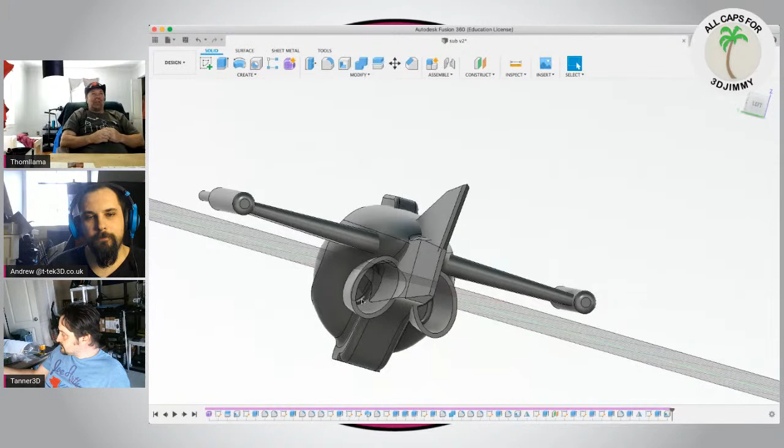I have not really been thinking about printing per se with my design, going 'oh, this is printable,' because that thing ain't printable right now. No way in hell could you print that. I mean, you could - there'd just be, you'd waste more filament, supports, voids, garbage.

But as I'm making the stuff, I always kind of keep in mind what color schemes and stuff I want - which, ignore this, this was just for prototyping purposes. I mean that would be really hard to print. How the hell would you print that thing and make it look good? That's why I model that, put materials on stuff as I model it.

I never even thought of that. Let's look - appearance, texture maps. I know appearance must be where you add materials, right? Yeah, if you select the entire body, you can do the entire body, and you've got clear glass, colored glass, then metals, paints, gloss paints, matte paints.

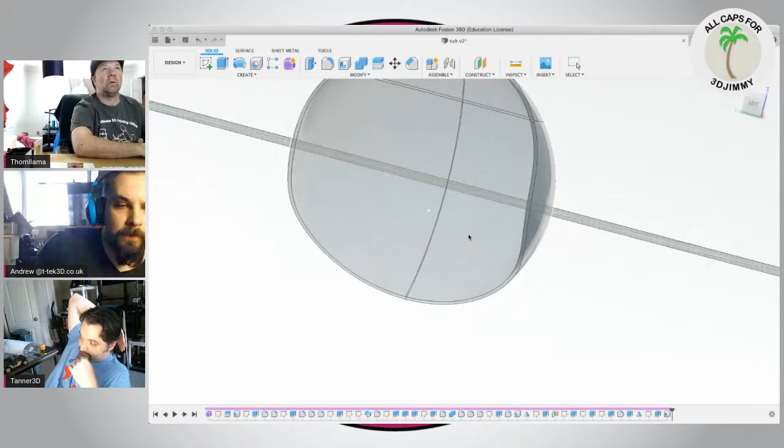I do it sometimes just so I can get an idea of different colors I want to add on, like metal flakes and things like that. Check that out, they made it all transparent. I almost never use the materials. It's really good, it gives you a great idea, especially if you're trying to do bodies on the inside. If you have something that's clear on the outside, you can look in and see if any of the bodies are meshing together or if they're just separate - that came out, that was like a perfect selection right off the bat.

So yeah, I was trying to keep 3D printing in mind as I was putting stuff together. That's why I like where the little canopy thing meets the body, it's flat. Because what I think I'll do is, if I'm going to fix all this for 3D printing, I'll make the headlight a separate piece that you could print separately and glue into the body.

But how would you even print a bubble windshield like that? How would you even go about it? What are you going to print it out of? Because you're never going to get anything clear unless you do resin. Maybe we can get somebody to resin print the globes for us. Well, that's the reason I cut holes in mine, and it looks like a B-52 cockpit instead. But I like my look better.

No. I do think that looks freaking cool. Oh wow, you can see right inside there and everything.

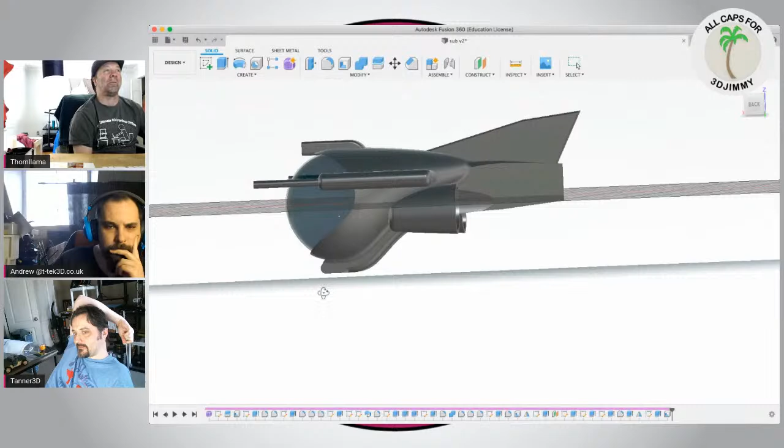Yeah, I've almost never played with the appearance tabs in here because I've always modeled for 3D printing more than anything else. And it probably is a little more system intensive too once you start applying, especially a clear material. Sure is, because I know clear materials are resource intensive in Blender too. I mean, this is rotating just fine. If I start rotating and it starts going dunk, dunk, dunk, then I know I've popped the system beyond what it wants to deal with anymore.

How's this? This is the rudder, right? Rudder. And save.

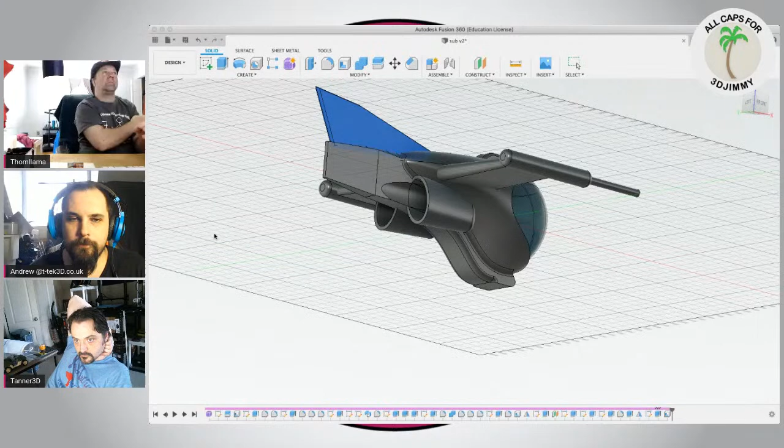Yeah, I have named nothing on my journey. Everything's just... I name everything if I'm going to have more than 2 or 3 different components for editing, because eventually I'll either weld them all together or cut one out of the other so you can print it in multiple pieces, depending on how I want to go about it. But if I don't, I never used to name anything, and then you're like, oh what's that, what's that, where's this? It's not so bad in Fusion because you can hover over it and it highlights on the model, which when you get to 76 bodies and you're like, oh no, which ones do I need and which do I not need anymore? Yeah.

I haven't decided if I like that straight wing either. Everything's so loopy and square except for the rudder and the wing. What about doing like the T-wing? Like, well, I was gonna slope it some, bring it back a little, or slope it forward like he did a little, just a little, so it isn't a perfect T. But I don't know, I kind of like it and I kind of don't. Where everything else is very, like I originally said, I was doing a tadpole design. You know, it kind of looks like a tadpole with guns.

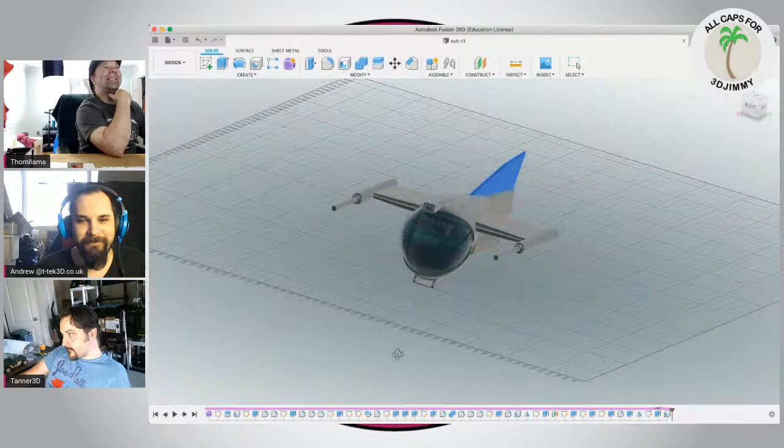Anyway, so that's that. It's 11:15. Tomorrow is another day. Yep.

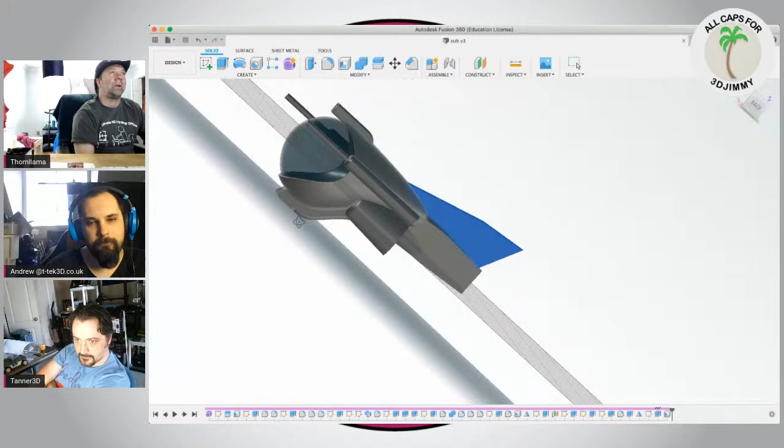That's pretty cool, man, I like it. Yeah, I like both of them. I like yours too. It's like... I don't know, it's just fun doing it.

Well, and I was thinking, since it's also a war machine, if it's not all glass bubble, maybe it can take a few shots before it cracks. Yeah, no, it don't matter. You put a hole in it, dude, and you're underwater, it's done, it's over.

That is cool, though. I do like the way you did the B-52 nose, that's freaking sweet. I always just figured the glass was for the whole visual effect, like I can see in every direction, my dude sitting there.

Dude, send me a copy of your guy, an STL or an object file almost. That way I can just drop it in there and see what he looks like. We'll do that tomorrow, I won't leave it in there because it'll bog the crap out of my computer. Oh yeah, I wish I had a little more ballsy computer.

I think I want this to not be so this. I want it to taper somehow, like off of these engine pods and go up to it. Kind of like this, I could probably do it in about 2 seconds. Even though I'm not supposed to be modeling anymore, we're supposed to be done. I just have interest now.

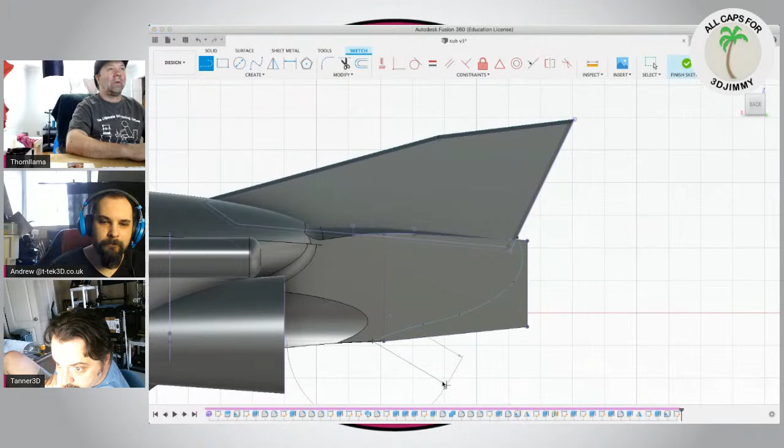And then I got to connect it all, so I just got to make a random line here, here, here, here, and end it there. So I have a hollow, so I get that, get rid of the bodies, so I can select this, and then bring the bodies back, and then do some extruding.

And then make it symmetrical. And hack that right out. And boom, done. Now it's got kind of a weird taper on the back.

Is that better or worse? I don't know, what do you think? I think I like it better, just a little bit, it needs to be cleaned up. And I think I shouldn't swell it out back behind the rotor, I should just be like the same plane as the back edge of the rotor. Right, what do you think? Sure, yeah, sure, they all say. Whatever, dude.

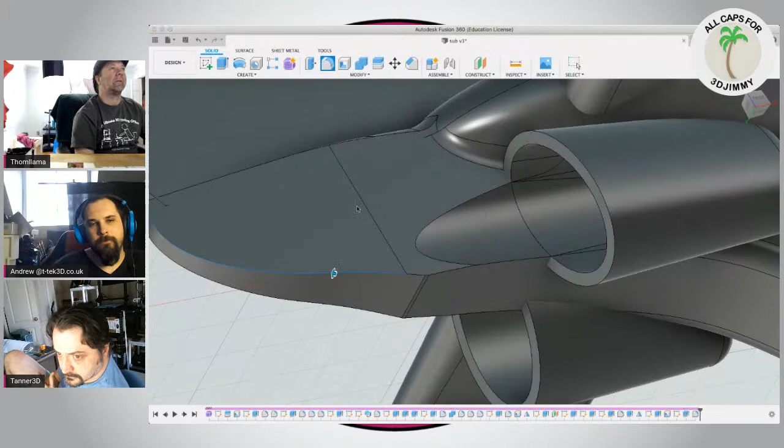And then I can just smooth this out because I didn't do so very good. Or not, why isn't it smooth? Why isn't it doing anything? I guess it is, just not very much. I'll round that over. It's going to freak out on me. Sort of freaked out on me.

Do like just 5 instead of 12. That rounds it all over nicely. Isn't that pretty?

Save. Yeah see, that's one thing, if you try to bevel an edge in Blender, as they bevel they can't cross each other. Yeah.

Yeah, there's points in Fusion that'll do that too, depending on if it gets complicated it'll say yeah, no. If it's something they can think of real easy, it'll go, yeah. Just like this one, for some reason I can't round this edge over. I have no idea why. This should be an easy round over, and yet it won't let me.

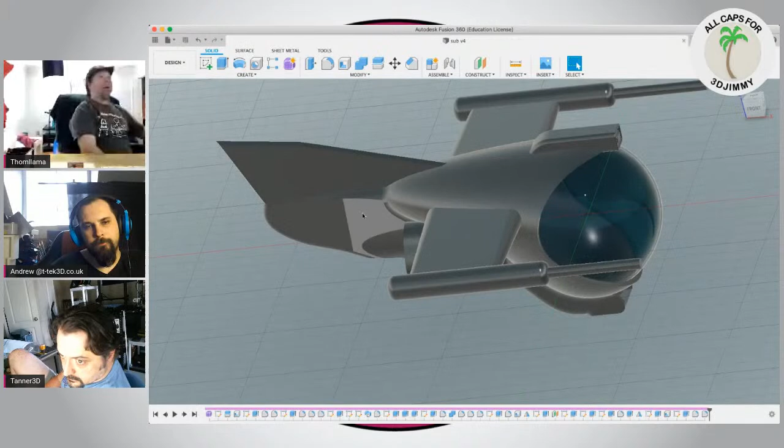It'll just error out, but it'll do it on the other side of the model, which I may do on the other side of the model and do like Andrew says, I may split the model right down the middle again and then just mirror it. Right, but I can't build and mirror anymore. I used to try it all the time, but if I build and mirror, I don't visualize it as well.